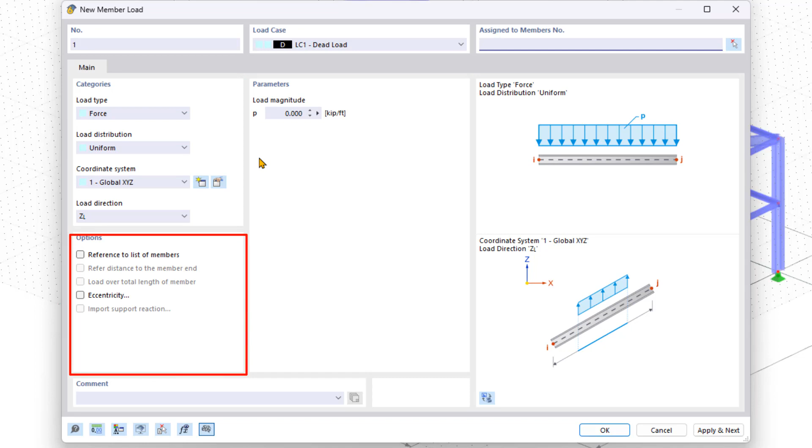In the Categories section, you can customize the load properties. There are additional options below this, such as eccentricities as well. In the Parameters area, you enter the desired load size and confirm it by clicking OK. Select the members in the structural model to which you want to apply the member load and confirm again by clicking OK.

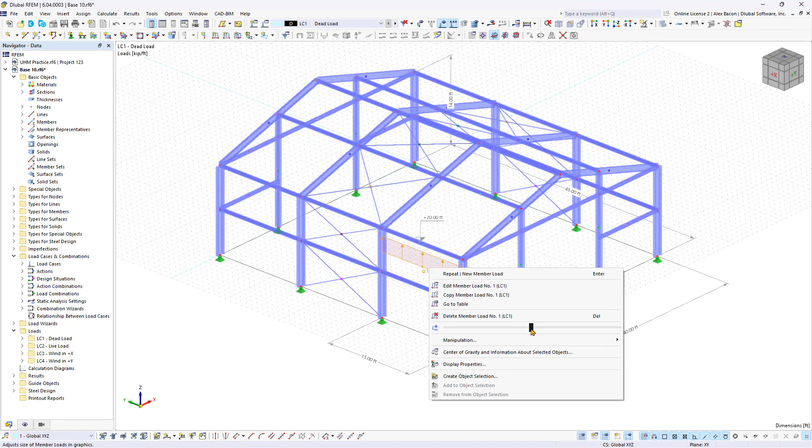Adjust the display size of the load with the controller in the shortcut menu, as well as double-click on the load to edit it and change anything you'd like.

Since the self-weight load case acts on the entire model, we'll now delete the member load that we just created and use a load wizard to create several loads for the steel hall simultaneously. We can expand the load wizard in the data navigator and double-click on Member Loads from Area Load. This way, surface loads can be automatically converted into member loads.

As usual, this dialog box consists of a list of available load wizards on the left, properties and options in the middle, and bitmaps on the right. Start by selecting the correct load case from the list. Use the symbols to the right of the list to create new load cases directly in this window, or edit the selected one.

In the Categories area, set the correct parameters for the respective load. The bitmaps on the right adapt immediately to the new properties. For the load size, add the corresponding value. You can find further options for this load wizard below that you can activate, and we'll leave them at the default setting. Now, we'll move to the Geometry tab.

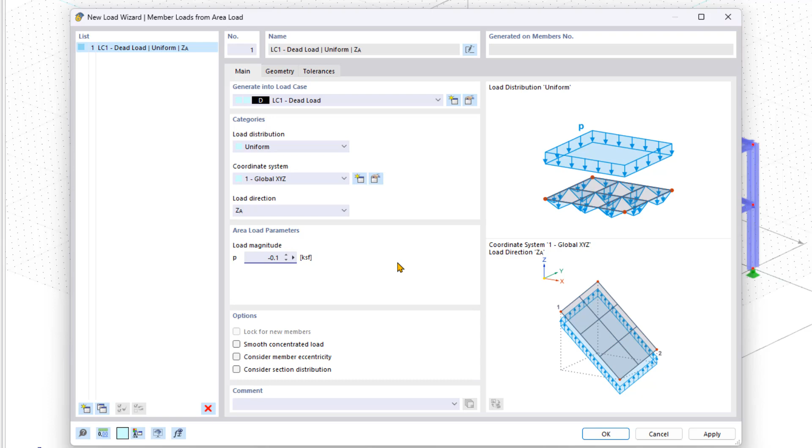You have two options for applying the loads to the steel hall. Depending on the command selected, you either define a plane via corner nodes or select cells in the graphics. Click on Select Cells in Graphics and draw a selection window over the entire structural model. You can deselect the relevant cells by holding down the Shift key on the keyboard.

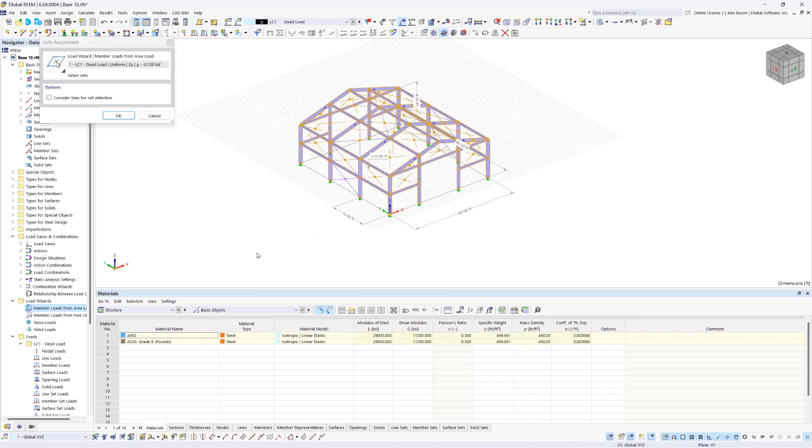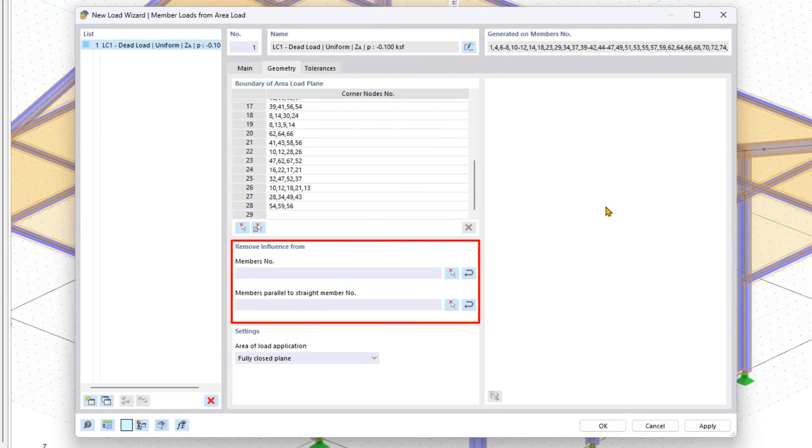Once satisfied with the input, confirm it by clicking OK, and you'll see all the selected surfaces listed. You can also exclude certain members from this loading by clicking on Members Parallel to Straight Member and selecting the desired member in the steel hall. Confirm the dialog box by clicking OK, and you'll now see the inserted loads on the structural model.

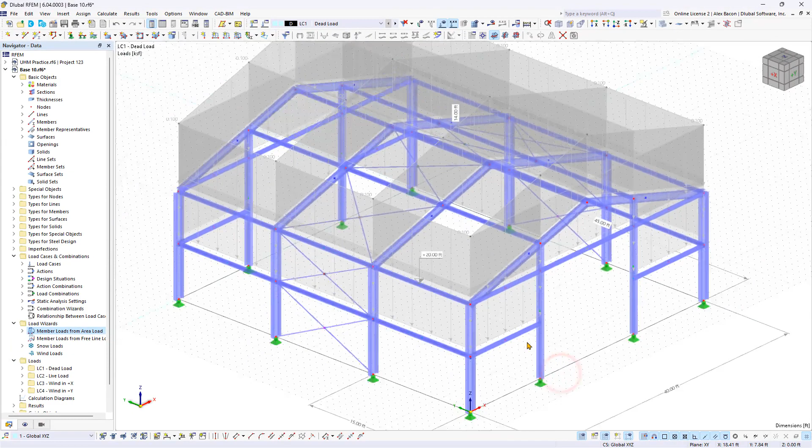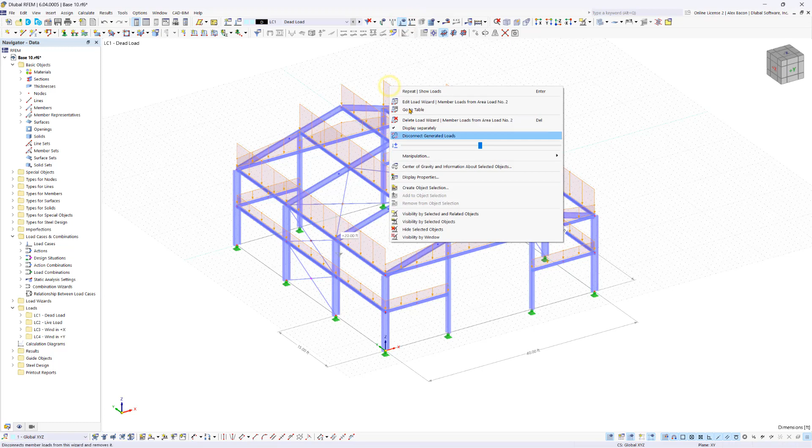To display the load distribution, right-click on the loads. Additionally, you can hide the load values or even the entire load using the respective buttons in the toolbar. In the dead load case, we've inserted the complete loading. In the next video, we'll explore other load wizards.